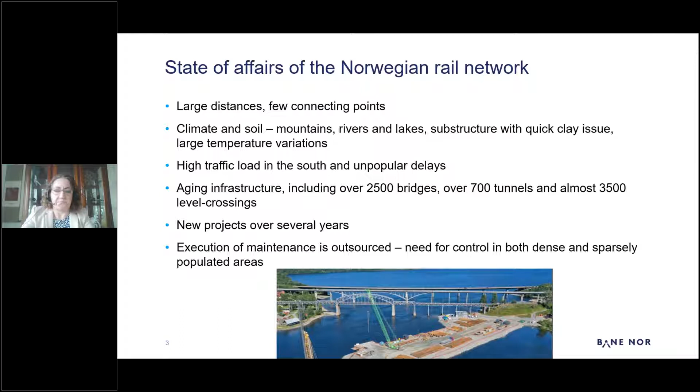A quick word about what we mean by innovation in Bane Nor. We have chosen the same angle as OECD, that is defining innovation as, quote, values from ideas, unquote, which means that there is a focus on impact. And as much as technologists and people loving technology, it's not just about technology, it's not just about digitalization or even an app, but it's more broadly about developing products, processes, and methods, and we seek to have a positive effect on the cost efficiency primarily, and also capacity of our network, having flexible solutions.

And further on, we have a number of different initiatives that constitute our portfolio of innovation projects. These projects are focused on value creation, and they are focused on experienced need that are being identified, and how to solve those needs, and how to anchor the good solutions in the organization. We have traditionally focused on improvement in specific technologies and specific competence, but we see also there is great value in discussing with interdisciplinary teams in order to find a good solution.

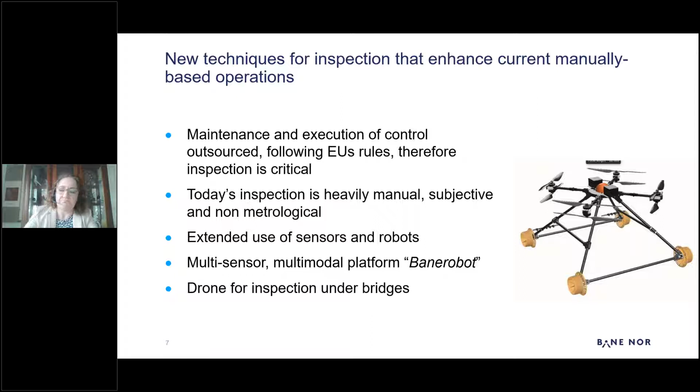Other projects, like the UIC project Drone for Rail, use only a drone solution, which is very useful in inspection under bridges to look for cracks and so on. But this one is multimodal.

Another initiative is the measuring wagon that we have. It is interesting to carry out noise and vibration measurements, among other types of measurements, of course. And what we have seen is that there is a strong correlation between the condition of the network, the tracks, and the vibration noise profiles.

So it's really interesting to actually characterize the noise signature in order to identify not only what we could do to have a more silent network, but also what we could do in order to have a better railhead, for instance, if there is corrugation seen on these heads, or some type of misalignment that causes noise. And we can at least identify it as soon as possible and correct it.

The other advantage that we have with this measuring wagon is that we have sensors on board, and we are able to cover very large distances with much greater precision than when we had static sensors. We just don't have the necessary number of static systems in order to achieve the same kind of results.

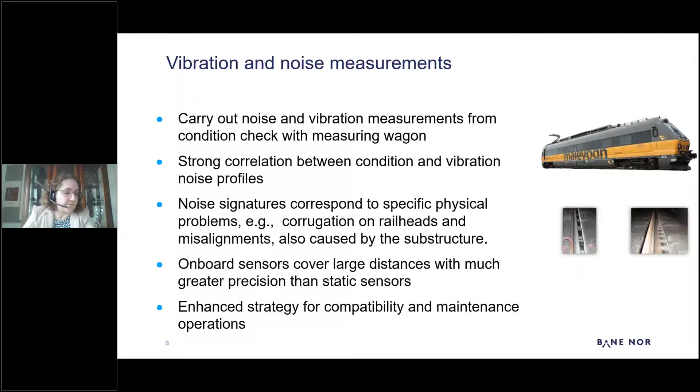The third example I wanted to go through is about video analysis. There we have the idea of using video and pictures for different patterns and for different purposes. We have camera-based inspection that can be airborne or on board, which means traveling more frequently.

We would like to develop a method for detection and analysis of tracks, what is wrong with the tracks, or what is wrong with the electrical system, or track switches, for instance. So we have video that is rather downwards, or straight ahead, or upwards.

We also use different data sources, because bear in mind that visual is very important, but we do have dark evenings, or a number of tunnels, and we would like to use other techniques in order to see what is going on at all times. So we also use laser and thermographic techniques in order to have a more complete and continuous coverage of the network.

For instance, pattern recognition has been applied to the analysis of track geometry. We are using, in collaboration with a research institute, a machine learning algorithm. And as always, the algorithm doesn't do the whole work. We have very good track specialists who give a good idea of how to have a good data set and how to have a good algorithm in order to have results that are relevant for us.

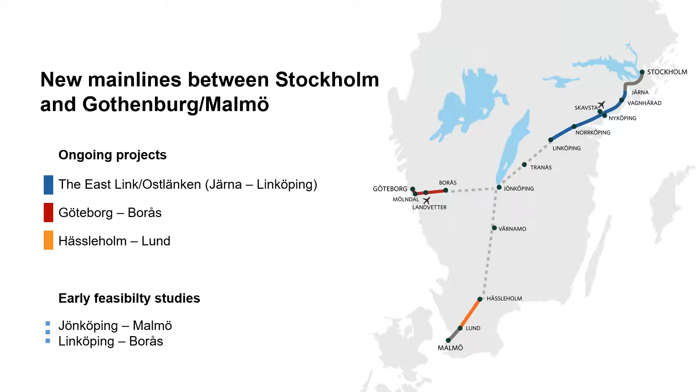For the stretches in between, we have made early feasibility studies, but they are not projects and are not financed in the current plan. My project, the East Link project, we're going to build 160 kilometers of double track. The design speed is 250, and we're only going to run high-speed trains up to 250 and fast regional trains on these new main lines—no freight traffic. That makes it possible to squeeze in more traffic.

The budget is 5.5 billion euros. We expect to have it ready for traffic in 2035, some parts perhaps even earlier. We're going to build 20 kilometers of tunnels, 150 bridges, 5 stations, and handle 20 million cubic meters of soil and rock masses. This is a very densely populated area—the city of Linköping in the south of this stretch is the 5th biggest city, and Norrköping is the 9th biggest city in Sweden. We're also going to connect to the Stockholm area where we have 1.5 to 2 million people living.

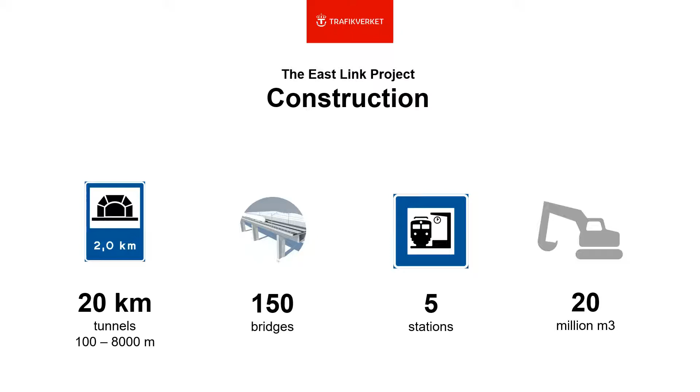If I move over to the topic of today, the preparedness for new technologies: the Swedish Transport Administration is a very decentralized organization and very highly digitalized. So when COVID-19 hit us half a year ago, we were quite well prepared, I think.

From one day to the other, we moved from about 1,000 people working from home before, to now about 6,000 people working from home. That's turned out very well and functions. When we move to the consultancy firms that work for us, they are most often very big companies operating worldwide—they work internationally in many countries, and around the clock in different parts of the world.

Technically, we use for design, we don't do any drawings today. We use BIM, Building Information Modeling, where you design in a digital model for design of roads and railways, which means you can look at what you're interested in and don't have to look at physical drawings. You can also use the information digitally in some way. I'll talk about that a bit later.

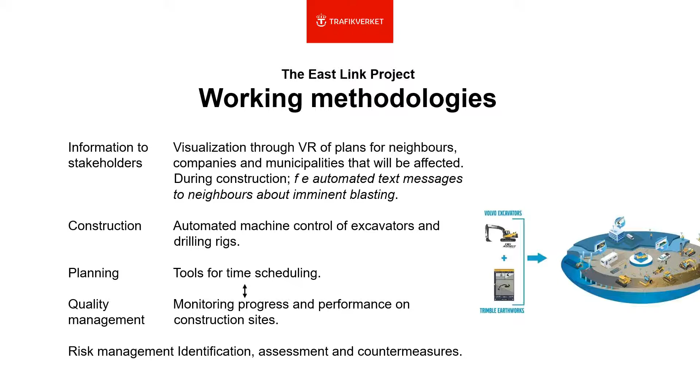We've taken the 4 biggest challenges that we face in this project as examples to mention how we use new methodologies.

For example, mass management. As I said, we're going to handle 20 million cubic meters of soil and rock materials, and a quarter will be surplus. So that's a huge challenge to dispose of all this material. But if you use this BIM technology, it makes it possible to optimize the design, and we can also use digital tools to plan and administrate the disposal of surplus material.

We have the travel centers. There are very complex passages through the cities of Linköping and Norrköping, and there are many stakeholders, and the city councils have big plans for this area, so it's a very important passage.

And as I said before, BIM and virtual reality make it possible to visualize the different alternatives to the stakeholders.

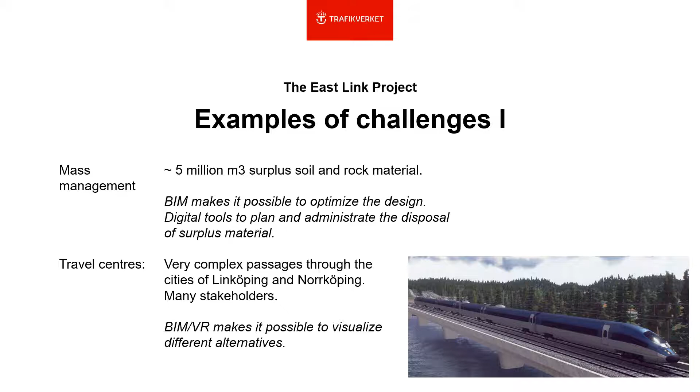2 more challenges are the ground conditions - regarding the same as in Norway, we have everything from very good ground material up to very bad. So some areas don't demand extensive ground reinforcement, so we'll use ground penetrating radar to optimize the reinforcement measures and minimize costs. Using the radar we can get more information, know more than using traditional methods.

And perhaps the biggest challenge in this project is the resources and competence, because we have a lack of skilled and experienced people, both on the client side and on the supply side in Sweden.

Having digitalized project documents and project databases makes it possible to work from anywhere in the world, 24/7. This doesn't apply for all staff, of course, but it makes things easier. And hopefully we can use translation applications in the near future.

Because for legal reasons all documents in the project have to be in Swedish, we'll need to make it possible to translate them if I have foreign suppliers.

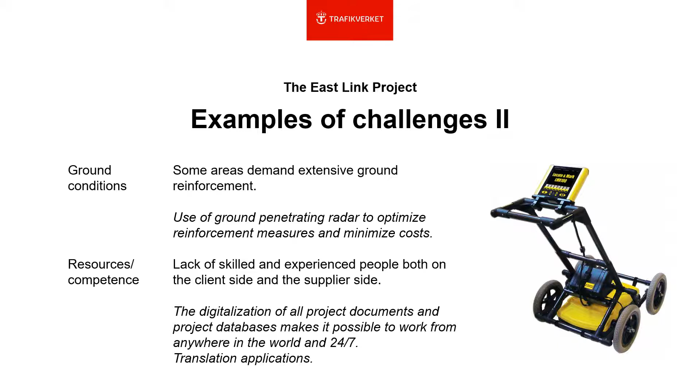So that was very short about the Link project and how we work. We have our own website in English where you can follow the progress. And if you have any questions later on, you can contact either me or my colleague Pelle Hovland, who is the procurement manager for the East Link project. Thank you.

Thanks so much, Johan, it was really interesting to hear about this project. It's such a huge project with many aspects to it. We'll dig some more into the detail there, particularly how you set up these processes, because you're doing some really cutting edge stuff with BIM and VR and so on. It makes sense to me, and I think it's an interesting aspect to explore later in terms of the communication elements required in such a huge undertaking.

So, it's time already for our final speaker of the day, and then we move into the panel discussion. We'll discover, I hope, some more about IoT architecture and how to control costs and so on. I know this gentleman's an expert in this area, and hopefully we'll see how that's related to maintenance and how analytics can lead to new business models as well.

So from Stimio, I introduce to you today the founder and CEO, Mr. David Dorval. Welcome, David. Thank you, Daniel. And thank you, Ben, for inviting me to this event.

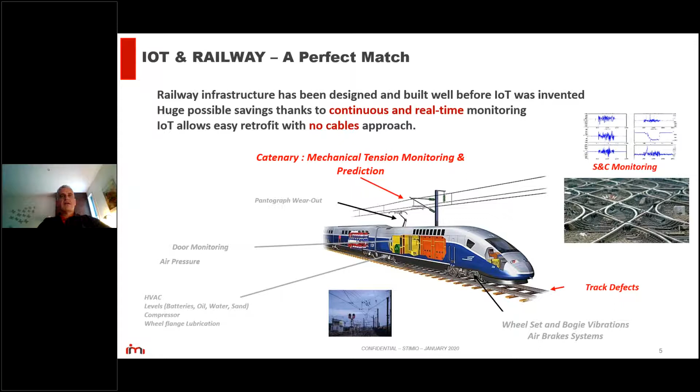The first example I'd like to share is how IoT helps detect track defects. The concept is that we have IoT devices, autonomous for years, attached to the frame of the train. We have more than one, between 5 to 10 per train. Sensors embedded in our devices measure position, speed, acceleration, and also record shock profile.

It means we have many MEMS accelerometers inside, and we record a lot of data. Then all this data is combined between the different measurement units put on the train. Location is recorded too, and we send the shock profile to the cloud, where an analysis tool identifies the severity and classification of track defects based on train speed, location, and mile marker.

For instance, mile marker means that some track equipment generates shocks, but we don't care - we just have to know where they are so we can discard this event. The concept, based on statistical and differential measurements, allows us to follow defect evolution, detect the initial defect, follow its evolution over time, and optimize costly track maintenance and repair machine usage. This matters because track maintenance and repair machines are often used during the night, so if you know where the defect is, you can fix it more easily and more efficiently.

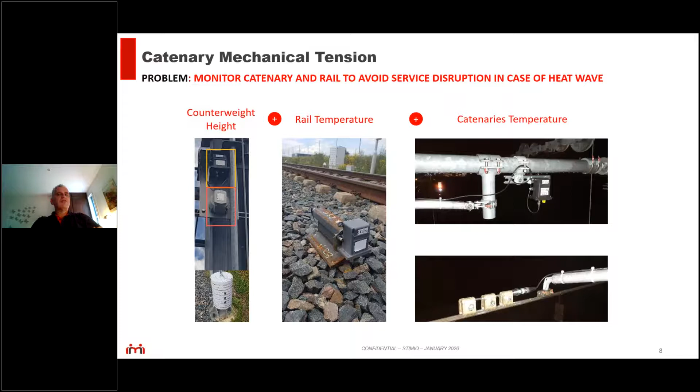With these 3 types of measurements, we combine them. First we have the time series - we measure on a quarterly basis, every 15 minutes, the temperature, the height of the counterweight, and the rail temperature. So we have basic time series that's good to have, so you can see how it behaves, but it doesn't give a lot of insight for the infrastructure manager.

What we do in the second step is model the catenary behavior as a function of the catenary model and local effects - for example, temperature. Each temperature level means a certain state of the catenary.

It's also completed by flux monitoring, and we do analytics to build a model of catenary behavior related to temperature. Then we predict the catenary profile up to 48 hours in advance, thanks to weather forecasts fed into the model. With this approach, we're able to inform the infrastructure manager to adapt train speed if required.

So we do this 48 hours or 24 hours in advance. We have a system directly linked to the infrastructure manager, who receives an SMS or email saying, okay, beware that within 24 hours, you'll probably have to decrease train speed because the catenary will be a bit weak.